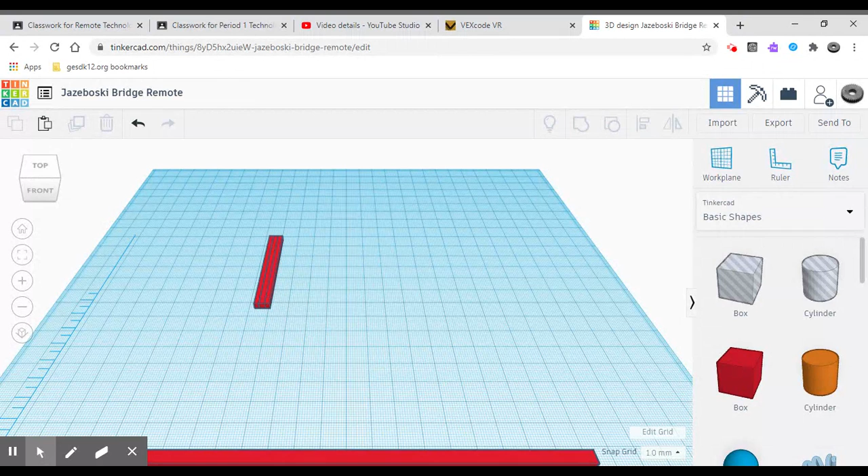Now when we see this, we have the second one created. You can see they're kind of jammed together there, and we're going to separate them. The first thing I always want students to do is click off of it first. That way you're going to click on it, hold down with your left finger when you click, then you can drag it apart. And right now it's not too important where it goes. All right, we're going to work all that out shortly.

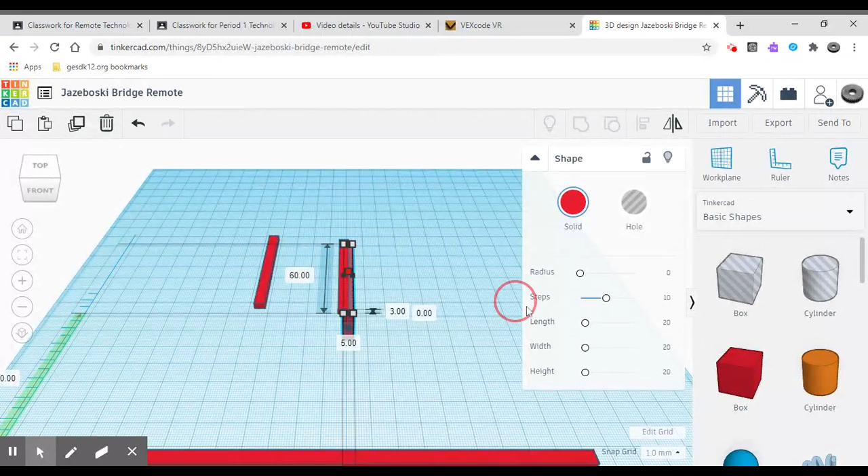The next thing we're going to do is we're going to make a few more. So the next one, we are going to click on another paste. Once again, click off, because what happens is if we click on one of these things and we by accident hit one of these little squares or something, we can make the piece bigger or the wrong size. You can see it drop below the work plane and it got a lot bigger.

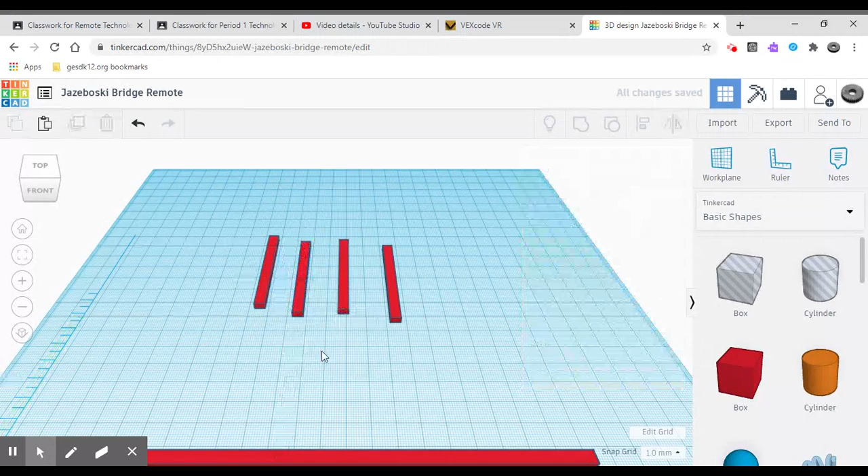If that happens, just click the back arrow, and then there's no squares, click on it again, hold your left finger down, slide it aside, paste another one, click off it, hold your finger down, slide it aside, and we're going to do one more. We're going to paste one more, click off it, slide it aside. That one I'll slide this way.

Now that we have those parts, what we're going to do next is we're going to bring them down so they're all even with the bottom of our base, or the bottom beam. To do that, we're going to use our X and Y axis. Now when I click on this, once again, you'll see that we have the Y axis right here. It's in light green. Click on that. Go down here, we have the X axis in light green as well.

And you can see when I put my arrow over the number 61, it lights up the red arrow inside of that green area. We're going to work with the X axis in a little bit. What we want to do is we want to work with the Y axis first. We're going to bring these things down so they're even with the bottom of the beam. To do that, we're going to make our Y axis 0. And it makes it perfect with the bottom of the beam.

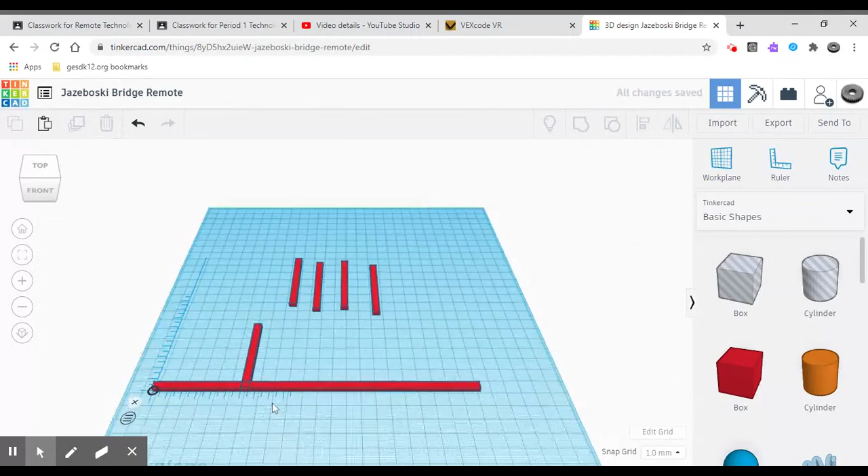As we can see, it lines it up perfectly if our beams lined up at the origin point of 0, 0. We're going to go to the next one, click on it. My number here is 84. Your number might not be 84, so don't worry about it if it's not. All you have to worry about is making sure you're clicking on the number for the Y axis and changing it to 0.

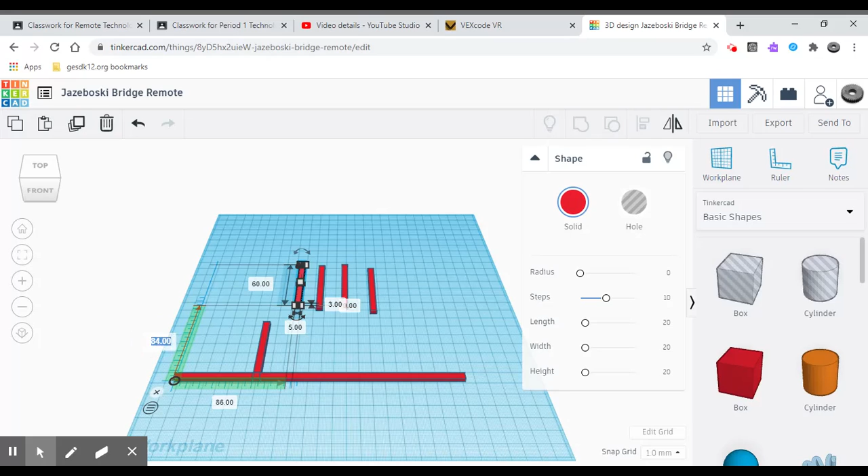I click another one. That one's 78, doesn't matter. We're going to make it 0. And then we're going to do the last two. We're going to make this one 0.

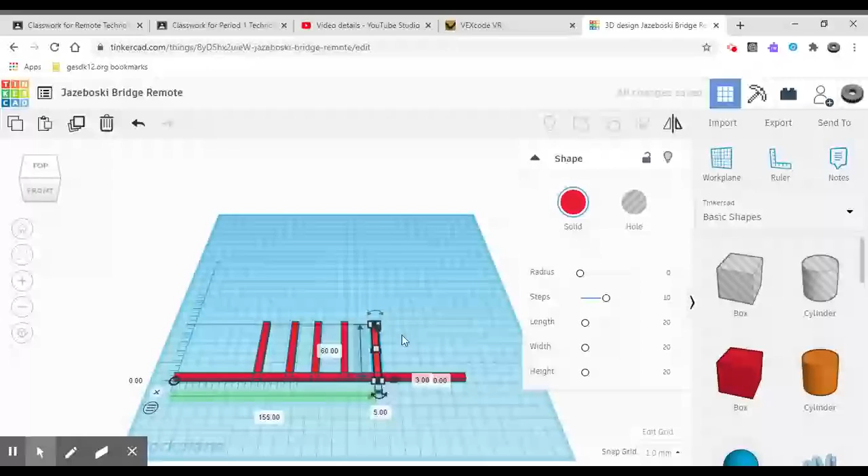And this last one 0 as well. All right. So now we have all of those parts lined up with the bottom of the base. What this part's going to pay attention to right here is the X axis, which is this part right there, that we're going to change, and you can watch this number right now.

That number is 155, but when I click on this, instead of measuring to the end, it's now going to measure to the center. So watch that number 155, and by just clicking on use midpoint, it changes it to 157.50, because that's 2.5, which is half of 5, and our width on that was 5.

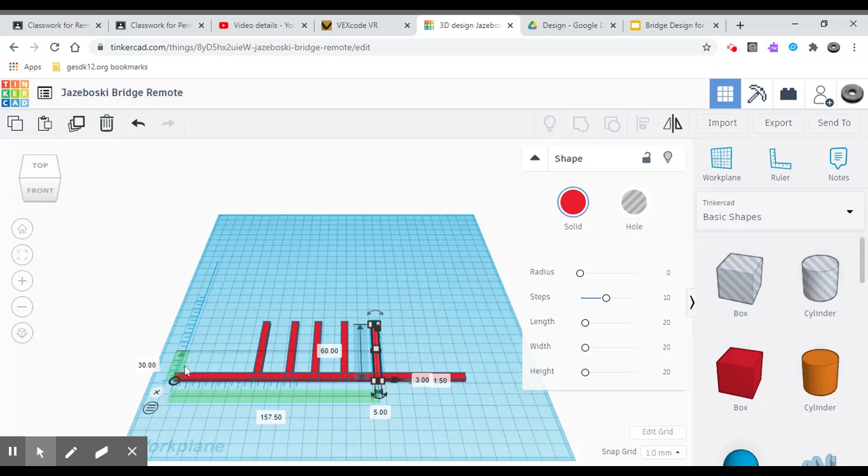All right, so I'm going to give you some numbers, and you probably want to get a piece of paper and write these down, because we're going to use these numbers to line up and make these bridge pieces, verticals, even going in the X direction here. So with that, the first number is going to be, for the first beam, 2.5. So what we would do is we would go down here to the 63, and we would change that number to 2.5 and hit enter. Right?

We click on the next one. Your number is probably going to be different than mine, remember. This is just because we just lined them up haphazardly. So yours might be different, but we want it the same at the end. And the number for the second one is 56.25. After that, the third one, that number is going to be 112.5.

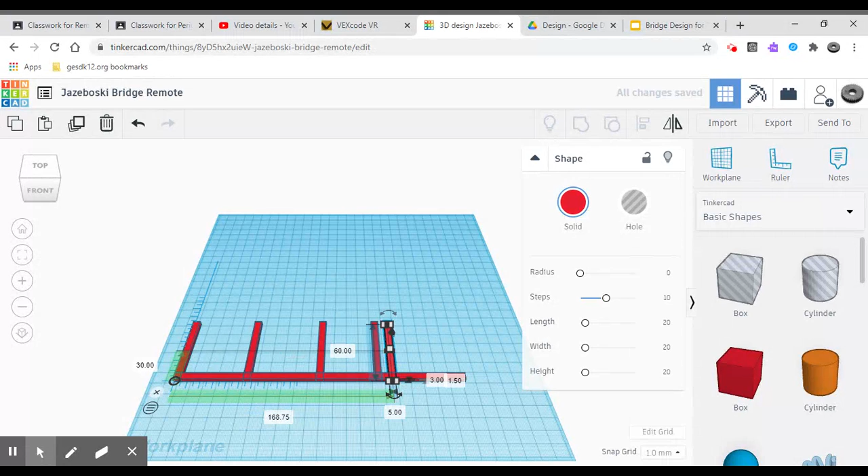This one is going to be 168.75. And this last one, which we've already overlapped, is going to be 222.5. Now you can see all of those are lined up evenly, spaces in between, as well as evenly with the bottom beam of the bridge.

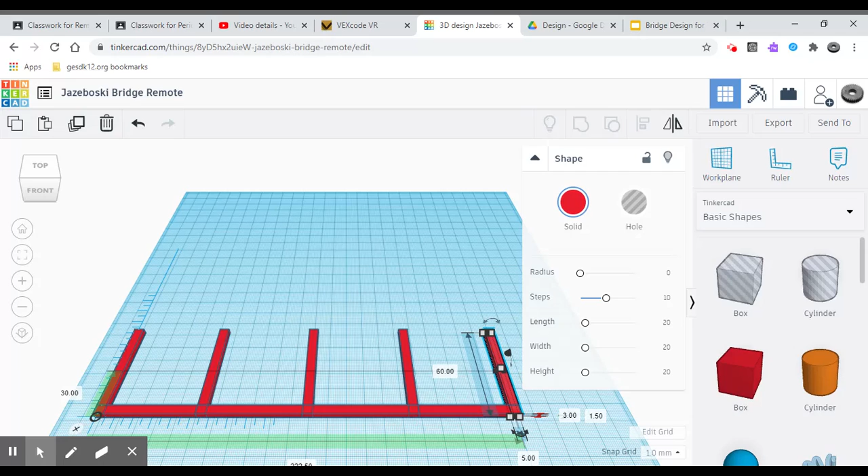Once again, if you want to write those down quick, the first one is 2.5, the second one is 56.25, the third one is 112.5, the fourth one is 168.75, and the last one is 222.5. Now that we have that done, we have to create the top beam of the bridge.

To do that, we're going to start by switching back from the midpoints to the endpoints. What I want you to do is go back to this circle with the three red lines, click on that, and then it should say use midpoint again, and you'll see it's changed that number as well. So now that we have that done, we're going to create the top beam. And the top beam's easy to create.

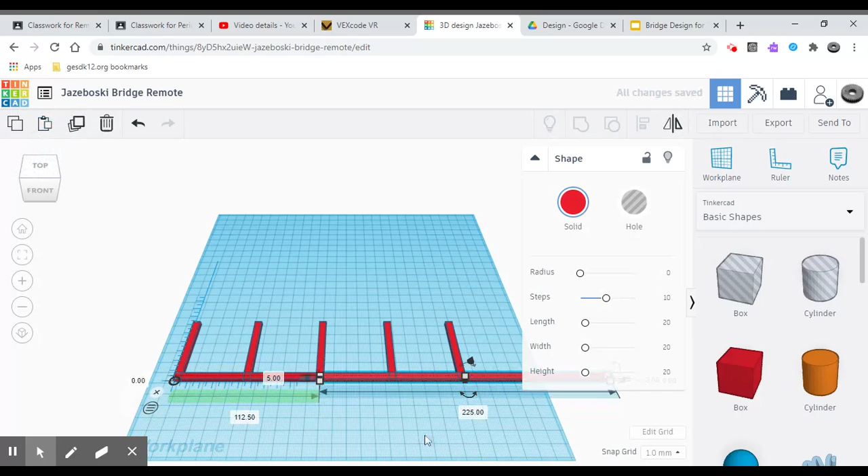We're just going to click on the bottom beam. We're going to go up to our copy tool on the top left. We're going to go to our paste tool right next to it and paste it. And then you can see right here how it adds that beam going out. Now we have two numbers. We have the y-axis number, which is at 0. We're going to make that number 55. Enter. The x-axis number is 112.5. We're going to change that number to 0.

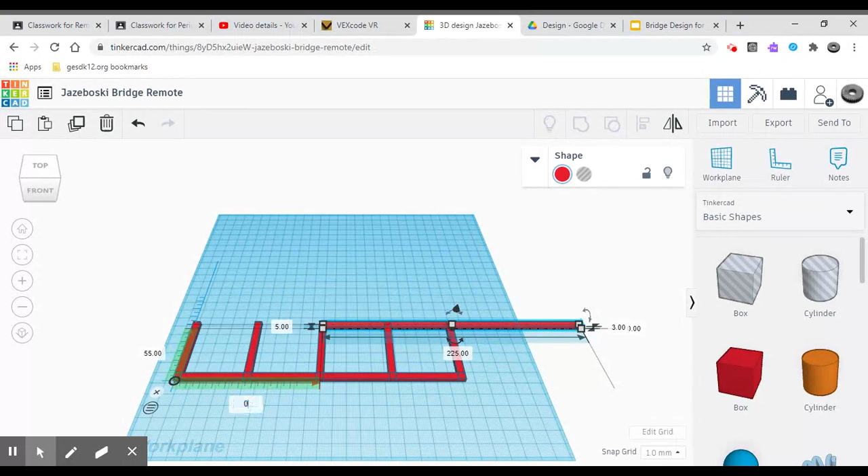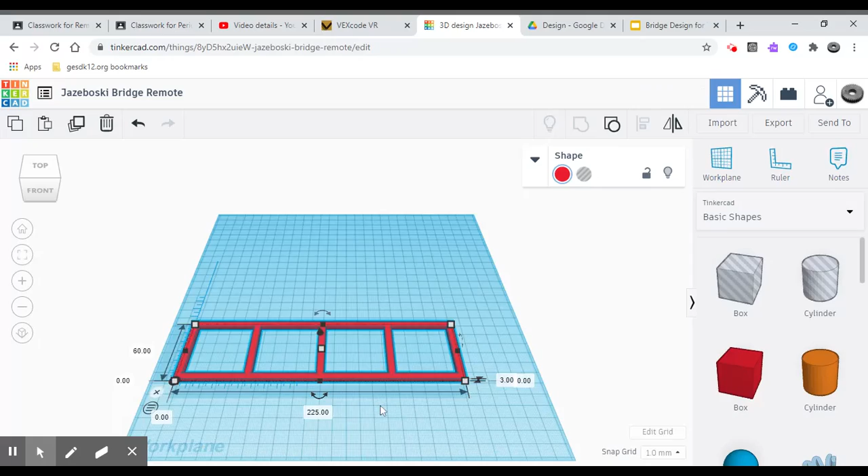And now we've created the top beam, and we have the basic framework for our bridge. The last step today is just to left click, hold down, drag across, so you select them all, and then we're going to go up to group. And there we have the entire part grouped together. So now, when we zoom in, we can see those lines aren't here anymore separating the pieces. It's all one piece. All right, good job. I hope you guys get this.